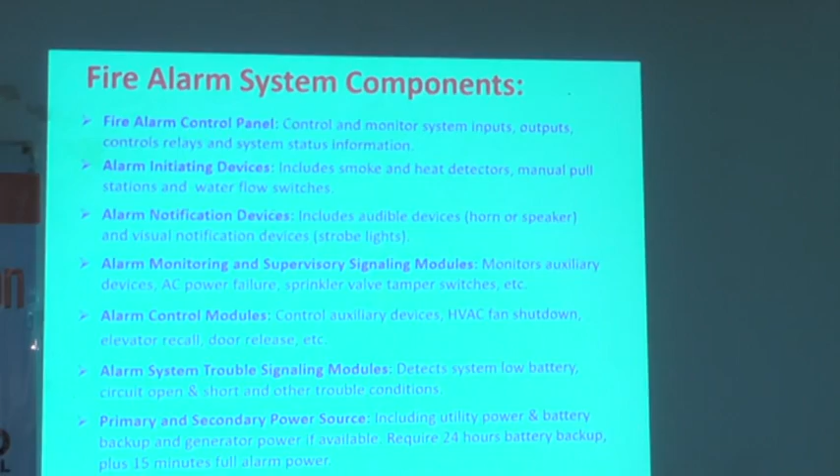We also have a monitoring device, a supervisory signal. The fire alarm signal is so important that if the wire is cut anywhere within the line, it gets a signal. There are 2 types of wiring, I'll come to that later. So it sends a supervisory signal and the signal comes back.

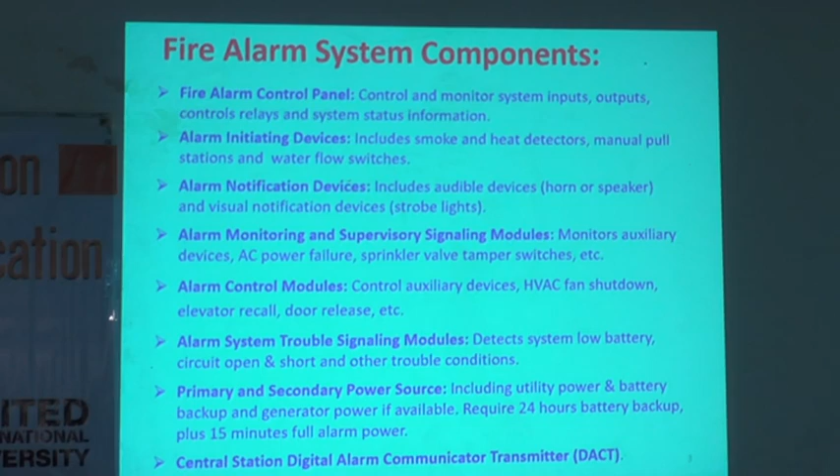At the end, either type A wiring has the wire come back, or type B wiring has an end-of-line resistor. So it sends a signal and that signal comes back to the panel, supervising the line. If the wire is cut anywhere, the panel knows and generates a supervisory signal, giving information on which floor or location the wire is cut.

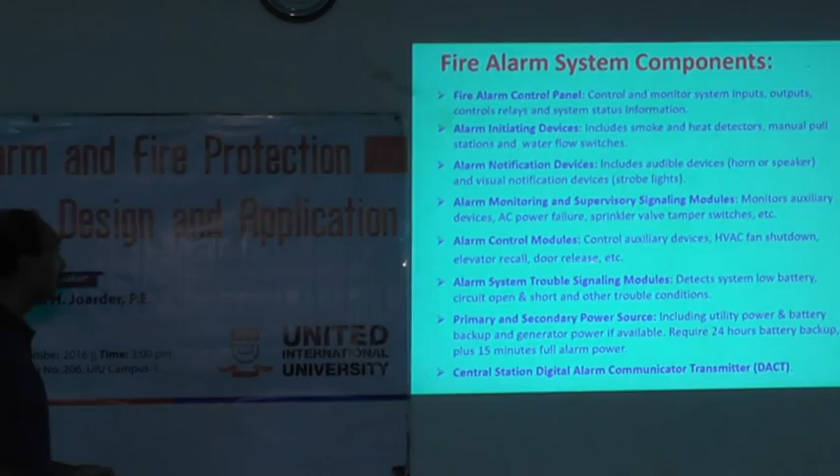There are other control modules, like modular air conditioning units that only supply air within one room. But in a larger building, they use a central air conditioning unit supplying air to maybe 2, 3, or 10 floors. So if there is a fire on one floor, that smoke goes into the central air conditioning unit and spreads all over the place.

That's why smoke detectors in the duct also monitor, and they shut down those fans automatically.

Also, if there is a fire on the 2nd or 3rd floor, we don't want the elevator to go there and disperse the occupants on that floor, because people might be walking into a fire. If there's a fire on the 3rd floor and people on the 1st floor don't know, they could take the elevator and come out on the 3rd floor where there is a fire. That's why the elevator automatically goes down to the 1st floor.

Primary and secondary power source: it's mandatory to have 2 sources of power, one is utility power, one is battery. It always has a 24-hour battery plus 15-minute alarm mode. So the battery can run the unit for 24 hours without alarm, plus 15 minutes in full alarm mode.

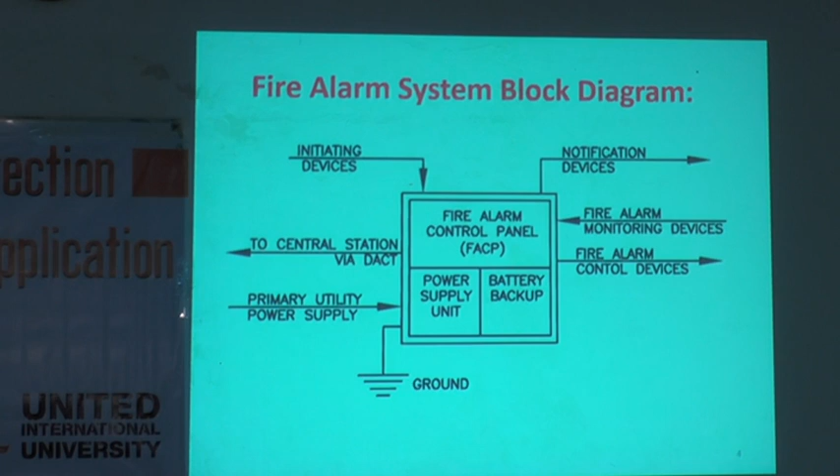This is the primary power, so it always has a grounding. So when these systems are installed, the grounding is always tested, to make sure that this system is grounded, so you don't have any interference or other ungrounded functions.

Voice alarm communication - those are normal fire alarm, but if it's a high-rise building in USA, it is considered 75 feet or taller. In USA, the tallest the fire department can go is 75 feet - their ladder cannot reach more than 75 feet.

So if there is a fire above 75 feet, the fire department has no way to reach there. That's why they have a special requirement for the high-rise building.

On a high-rise building, if you have a 20-story building and there is a fire, and a fire alarm going on, what will happen? Everybody will be rushing out. There will be a stampede, and instead of doing something better, trying to go through the stampede, there will be an accident and somebody falls down.

So in the high-rise building, what they do is, if there is a fire on say the 15th floor, the floor and the floor above and below - these three floors - they evacuate. So you have a scheduled, sequential evacuation. Not everybody is trying to get out at the same time, because that will cause a stampede.

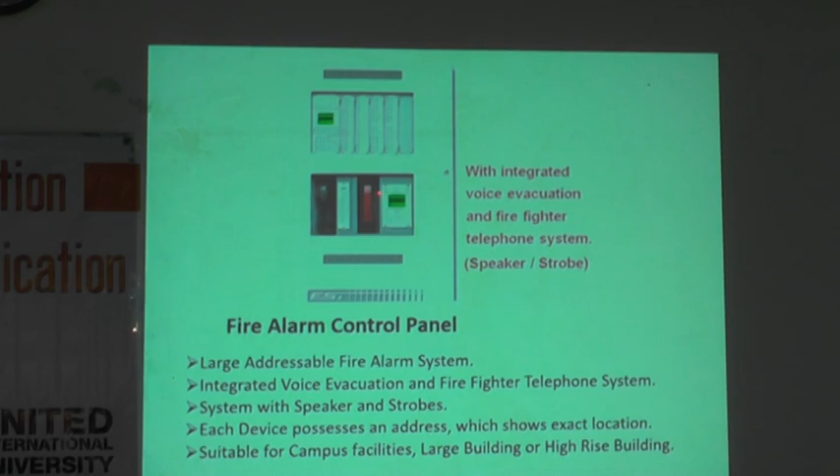And these are for the large volume system, for the high-rise. They have a telephone which will communicate with the fire department, and for high-rise buildings they call these large addressable systems - meaning if there is any condition anywhere, all the smoke detectors have an address.

They send a signal to pinpoint exactly which floor and which room number. When they install it, they program it - this device is programmed with where it's located, and there's a little LCD display that tells where it is.

On the LCD display, they will tell exactly which floor and which room number that the fire is in, so they could find out. And on each floor there is a fireman's phone - from the ground floor, on each floor there is a phone with a direct connection, so they could talk to each other, and they could also talk to the fire department.

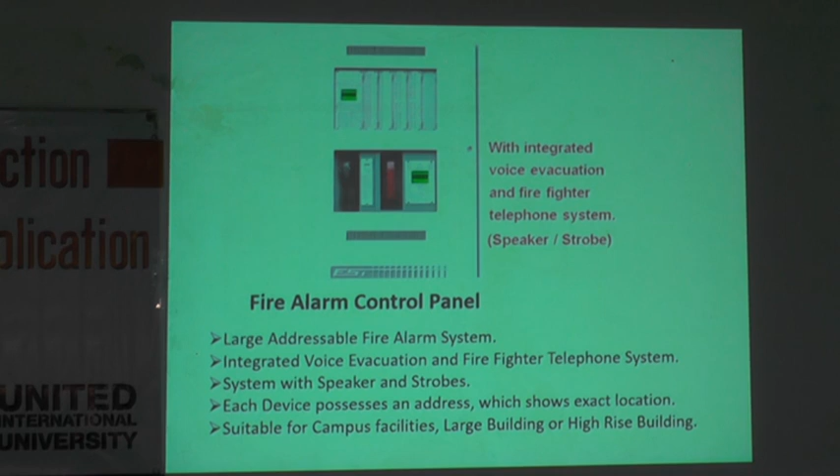And this is the announcement - this is the microphone, they could make announcements. This could be, if you have a campus with 3 buildings next to each other, they could be daisy chained and connected as a network, and connect to a computer system. Connection to this - so look at these ones.

They might have a computer station right next to it, with software. So this type of building has a main command center, and on each floor they have sub-panels, normally called DGP, data gathering panel. They are all looped together and connected to the computer.

As soon as there is a fire condition, it shows exactly which floor and location it is, with a graphic display. The floor plan will pop up. When they install it, they take the floor plan from AutoCAD drawings and program it, so each device is connected. If one device goes off, the floor map comes up and shows a star over that location.

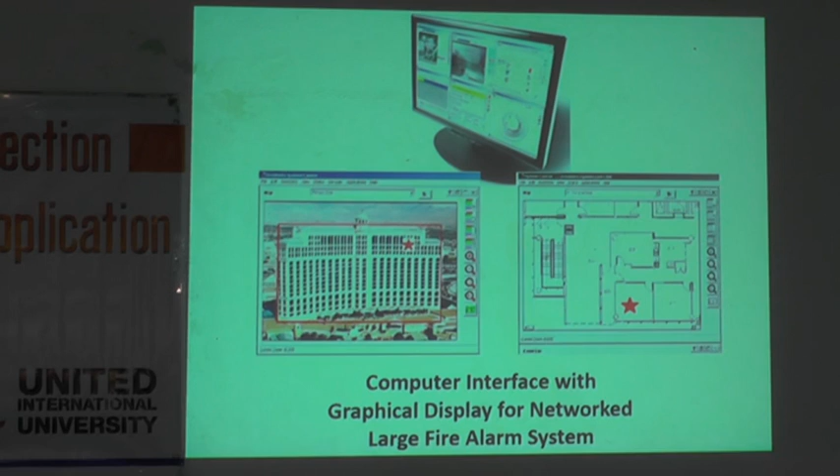So within 10 to 30 seconds maximum, the operator downstairs at the command center would know exactly where the fire is.

For occupants in these high-rise buildings, if you have a fire, there's no need to evacuate everybody. A building like this could have 2,000 people, and if you try to evacuate all 2,000 at once, you'd have a stampede - people falling on each other, stairs jammed.

So what we do: if there's a fire on, say, the 14th floor, we evacuate the floor above - 15th floor, 14th floor, and 13th floor. At the command center, they already know the fire is on the 13th or 14th floor. They go on the microphone and tell occupants of the 15th, 14th, and 13th floors to evacuate the building.

At that time they normally use the stairs, not the elevator, because the elevator might get caught or stuck with the fire. They use the stairs and go down, then watch what is happening - has the fire protection system started, or is the fire spreading? As that's happening, they request other occupants to evacuate as needed.

So these are the graphical displays in the network. If you have a campus situation, like many colleges or universities with 10 buildings, they could be daisy-chained with a command center at a central location, so you could monitor even 10 separate buildings from one location, all connected together through a fiber optic network.

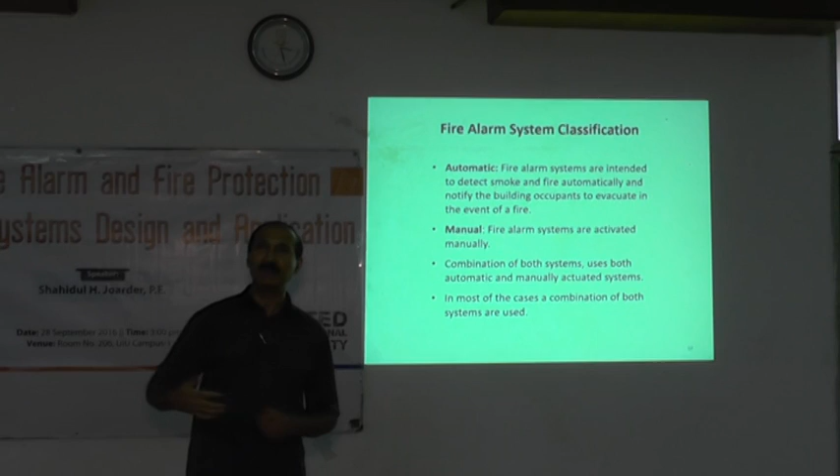Fire alarm systems have two clusters: automatic and manual, and they could be combination. Most places are actually combination. But some places like storehouses and retail malls could have just manual. They might not have anything automatic, just manual, because there are people all the time over there, so you don't need any automatic. If there is a fire, somebody will see it, and if they see it, they could manually activate. But most large buildings have both - a combination system.

Initiating device. Automatic initiating devices are smoke detector, heat detector, sprinkler, water flow switch. In the fire protection system, in the sprinkler, if water goes, there is a little water sensor. It senses that there is water going, so that also monitors it. And video image smoke detector - like newer cameras, some of the cameras can actually monitor if there is any smoke conditions. So those are automatic. Manual is a manual pull station, like in a police station, you could pull it. I'll show you in the next.

Smoke detectors, there are different types, okay? Ionization type, photoelectric, beam detector, air aspiration smoke detector.

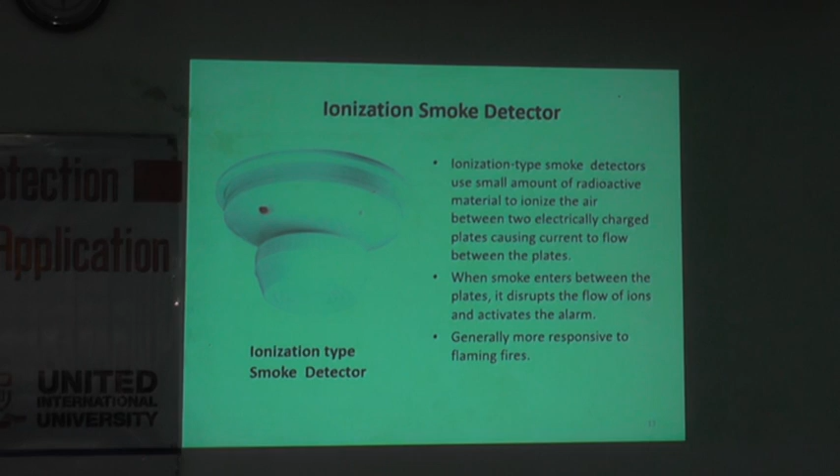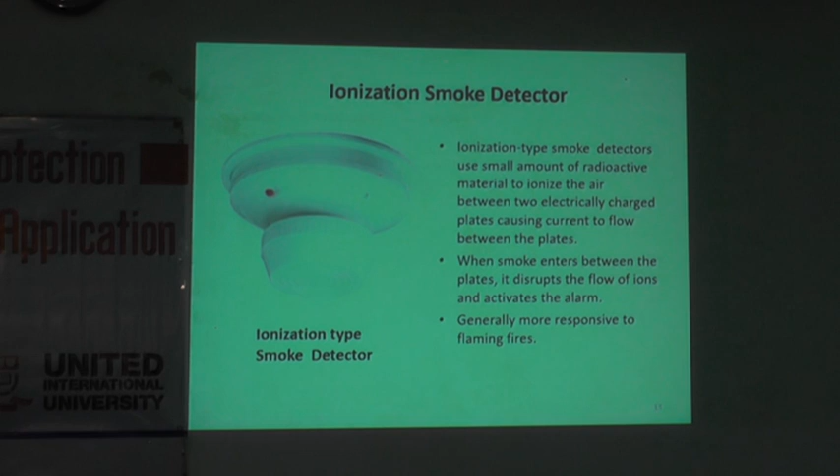Here is one - these are ionization smoke detectors. In the ionization smoke detector, there is a little bit of radioactive material within a chamber. As the smoke goes within this chamber, this radioactive material has a charge, like ions, and that causes current flow. As the smoke goes in there, that flow of current stops because the smoke is in between, and that's how it detects that there is a smoke condition. Now the ionization detectors are much less used over the period because there is a little radioactive material. As their lifespan passes, they last for like 10 years, after which they might need to be replaced. And at that time, we have to consider it as radioactively polluted, so you have to dispose them with special conditions to be taken. That's why they are using much less ionization type.

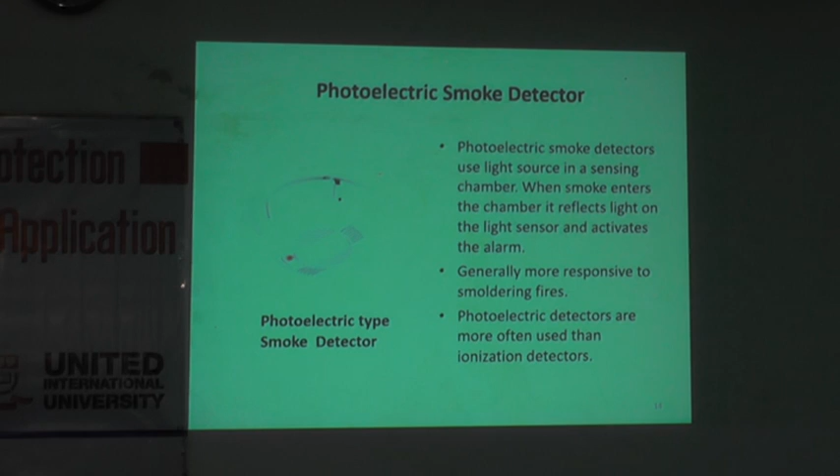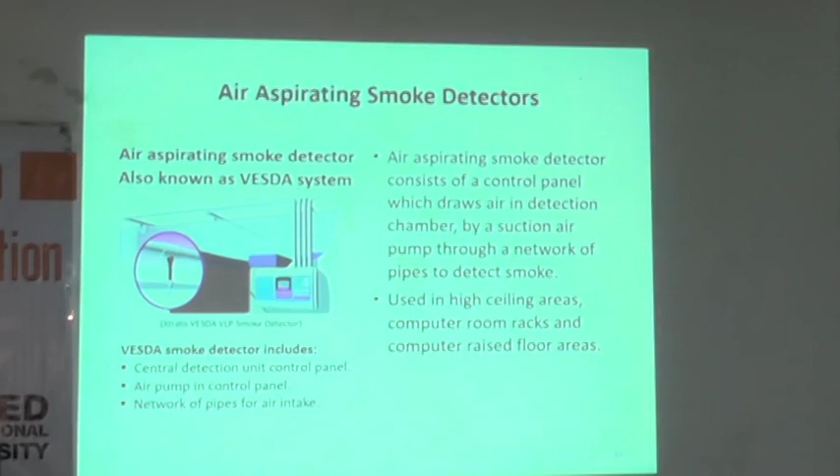These are called air aspirating smoke detectors. What it does is has a little control panel with a little vacuum pump actually - it sucks air through these tubes. The tube goes like this, you see one tube and then little short tubes branching off. These are normally used in computer rooms, data centers. The data center always has what's called a raised floor - normally installed about 18 inches high from the floor. So there is a false floor, like a false ceiling, they use a false floor.

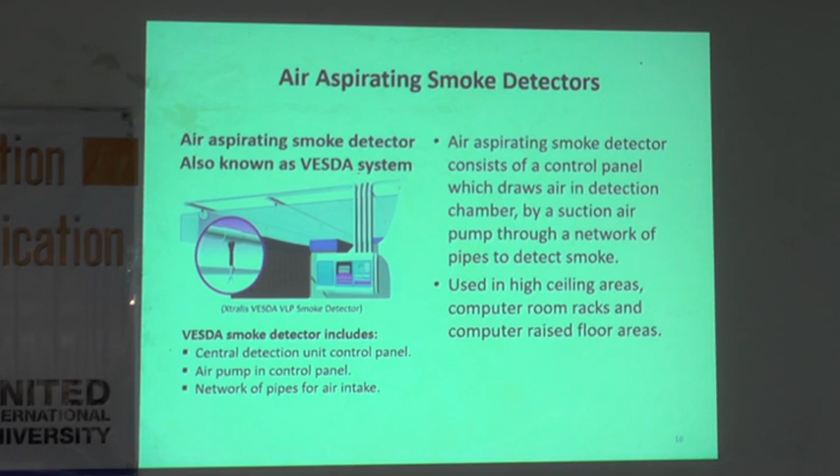The data center - I don't know if you've ever seen one - has hundreds, thousands of wires. If you open it up, it's like spaghetti of wire. I don't have the photos, but I could show you sometime if I remember. It's like spaghetti of wire, full of wires. And there is a very good chance of those wires at some time catching fire because of electrical malfunction, short circuit, or other reasons. So data centers are prone to electrical fire. Keep that in mind - I'm sure you remember there was a TV station that caught fire. Which one was that?

A TV station, right? If you ever went to a TV station, you saw spaghettis of wires. So if you have spaghettis of electrical wires, for whatever reason, at some point they could get a short circuit and they could catch fire. Okay? So normally, even in hung ceiling areas, when they have a large bulk of wire concentration, they normally use these. These are very effective because you could run a pipe through all this.

If you have a raised floor, you could run a pipe all the way to the raised floor. And this pipe has little holes every 18 inches. Okay, and it's sucking air. So it's continuously sucking air through its system, raised floor or over the ceiling, or in a confined space where you have lots of electrical wires. And it's analyzing in this control box if there is a fire. So these are the areas they use, okay?

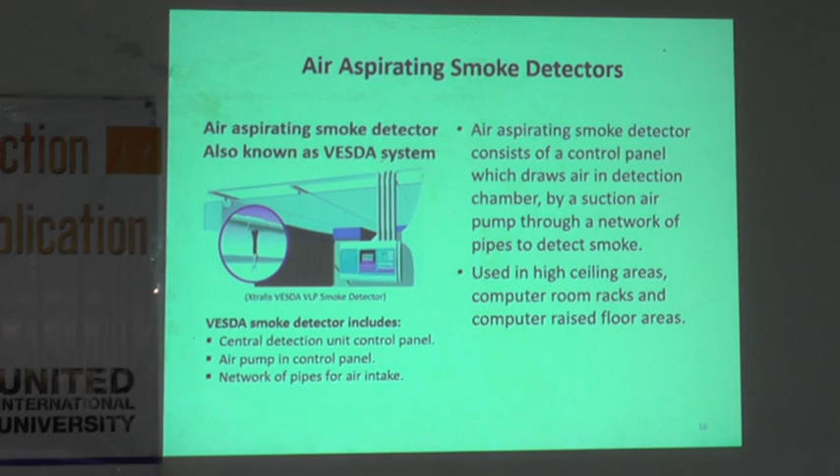So they use them in high ceiling areas, computer room racks, computer raised floor areas, and they could even be used in TV network stations, wherever there is a large amount of electrical wire and a chance of fire.

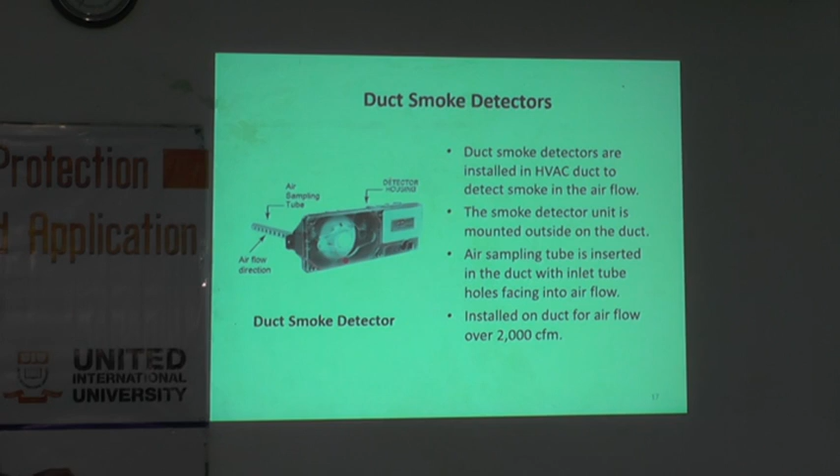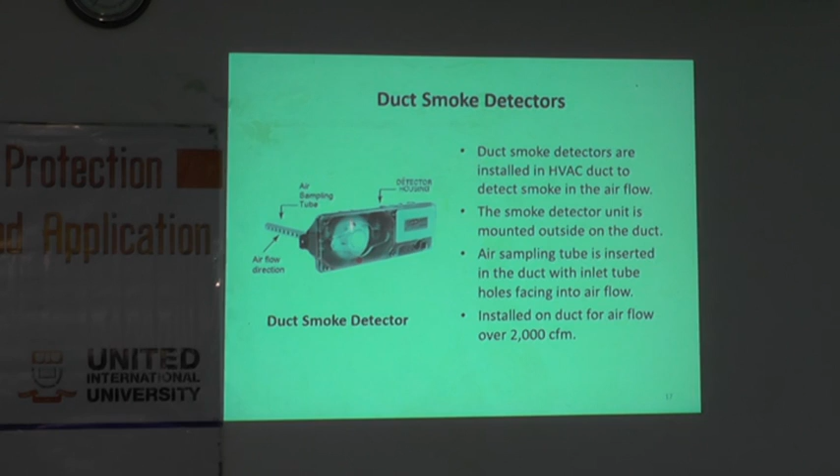Okay, these are the duct smoke detectors. This is what I mentioned in the beginning. If you have a duct supplying air to multiple floors, then you have this little tube. This tube goes inside the duct. So consider this as a duct, okay? This will have a tube going inside and a little box. This box will be outside, right over here.

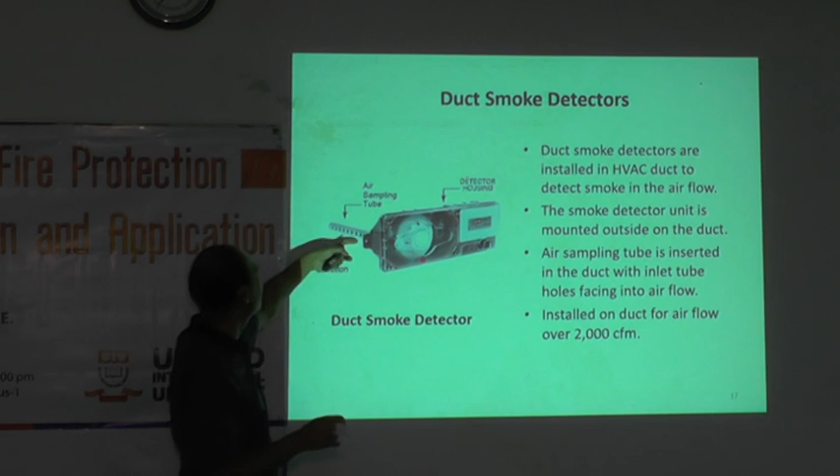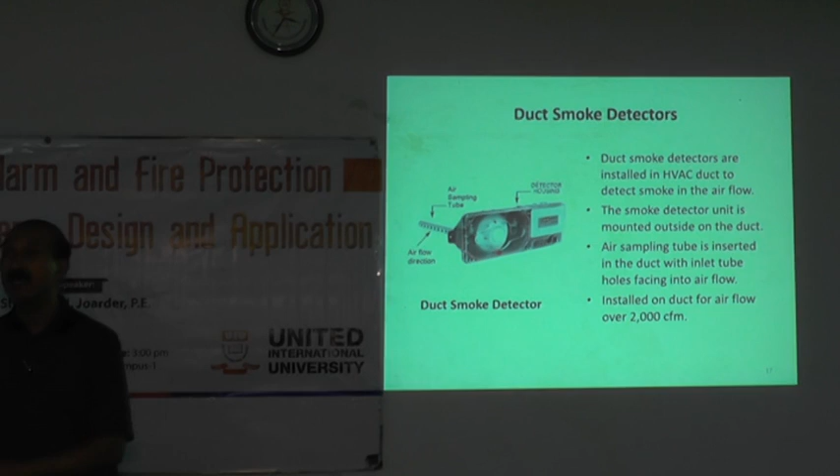And as the air passes through, it goes through these tubes. Because it has velocity, it automatically comes into this chamber, and it always gets analyzed. And if there is any smoke detected, they'll shut down that air handling unit immediately, so the smoke does not spread to any other place.

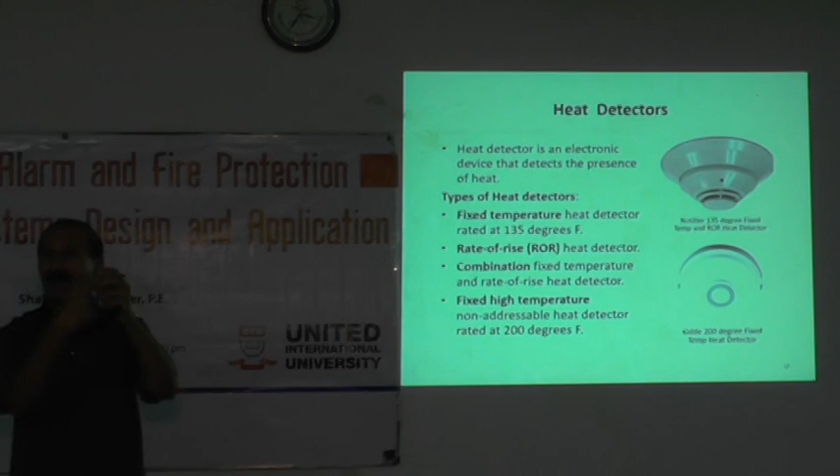These are the heat detectors. Heat detectors normally have two different types, either fixed or rate of rise, and there could be a combination also. There are also high temperature ones used in boiler rooms and others. The way they work is they have bimetallic strips. So if there is heat, the bimetallic strip, two metals, bends and makes contact. Normally it's the bimetallic strip or an electronic circuit with a material that senses heat.

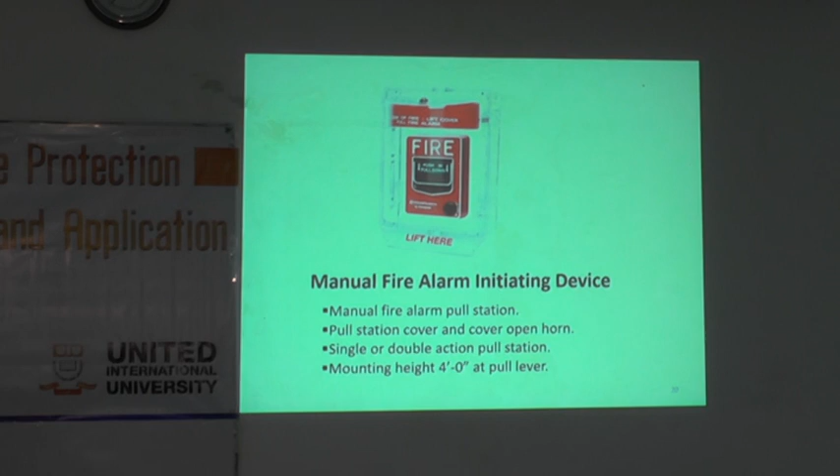These are the manual pull stations. These are normally installed at the building exits. If you see a fire and you are running out of the building, you could pull it so other people know there is a fire. These are always installed within 5 feet of the exit door. If you have multiple stories, you put one within 5 feet of the exit door of each floor, and also at the exit of the building. And these are manually operated.

Now there is always a concern, like in school, especially in university, just before the exam you will have a fire condition, okay? You know why? Because we have done that also.

So they use a cover. This cover has a battery inside it. As soon as you open this cover, it sounds a local alarm. Woo! Okay? So you still haven't pulled it yet, you only opened the box. As soon as you open the box, it starts making sound.

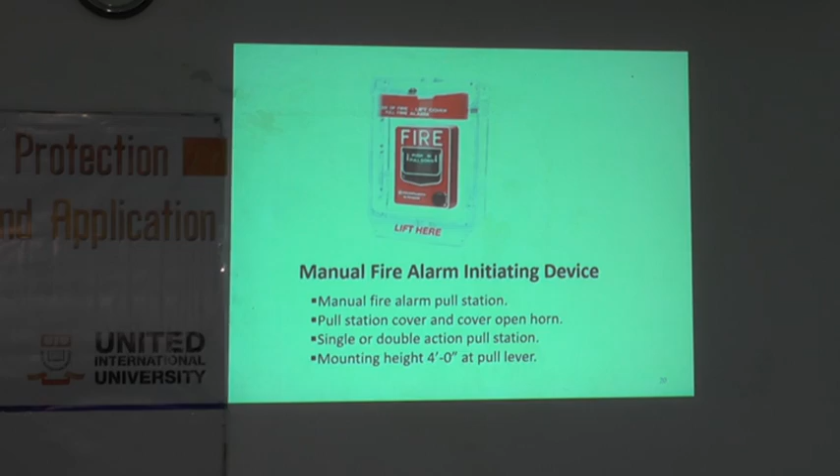So in a condition like this, if somebody is trying to play with it, as soon as you open the box, it starts sounding. So other people will see he's doing something, messing with that, before you even pull. But if it is a real fire, of course then you pull. So these are called double action, okay?

You can't just pull it. You have to lift it and pull it. That's a double action. You have to take two little steps. It's still two actions, okay? So open the cover and pull it. Double action. You see here, pull.

So you'll see in the catalog cards, pull stations come as single action and double action. Double action means you have to pull a cover and then pull it. So you have to take two steps. And while you're pulling the cover, you could put a little alarm on that. So as soon as you open the cover, it's making a sound, so other people around could see.

The valve tamper switch. If you have a sprinkler system and you have a water valve, if you close the valve, your fire protection system is no good anymore. It's dead because you closed the valve. So we monitor the valves. At each valve, there is a tamper switch. As soon as you're closing the valve, that switch also closes and sends a signal to the fire alarm system that the valve is tampered. That's why they call it a valve tamper switch.

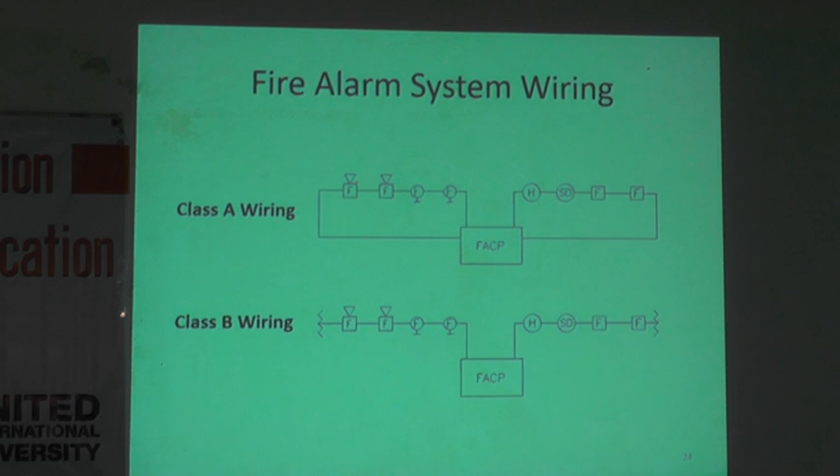Class B wiring, this is called end of line resistor. So the fire alarm control panel sends a signal, the end of line resistor then sends a signal back. Okay, so that's how they monitor. In this case, if the wire gets cut off over here, these two will not be functioning anymore, but these two will be.

But the fire alarm control panel will get a signal: okay, I'm sending a signal, that signal is not coming back. That means I have a wire cut off someplace. And it will initiate a supervisory signal for troubleshooting. Okay?

Codes. Well, the newer Bangladesh National Building Code implemented a lot of fire alarm and fire protection requirements. It happened that I did not get hold of the latest code. Does anyone know what the latest code is? I have a draft version of 2015. Anyone have any idea?

The main requirement is the building code. If the code does not enforce it, nobody is voluntarily spending money. You have to force it, or it's not going to happen.

So the code is the enforcement. The newer code, the draft version I saw, has a very detailed requirement for all the fire alarm and fire protection system. I'm sure after all the high-profile fires happened, and a lot of people, parents died, very unfortunate. This newer code is implementing all those requirements.

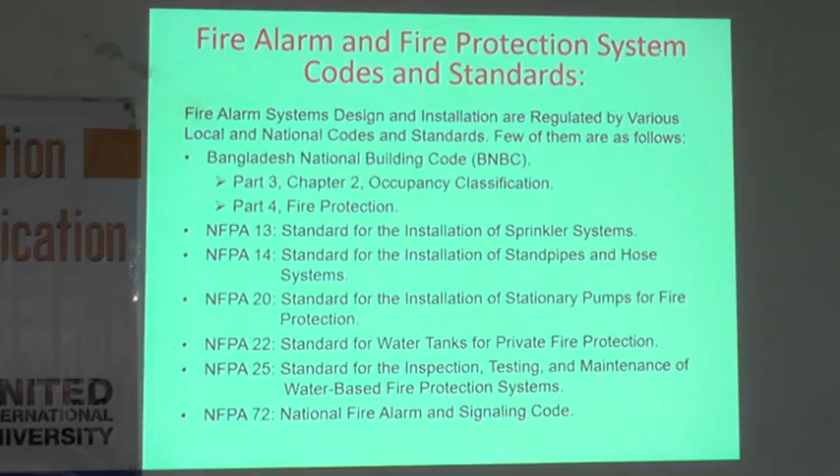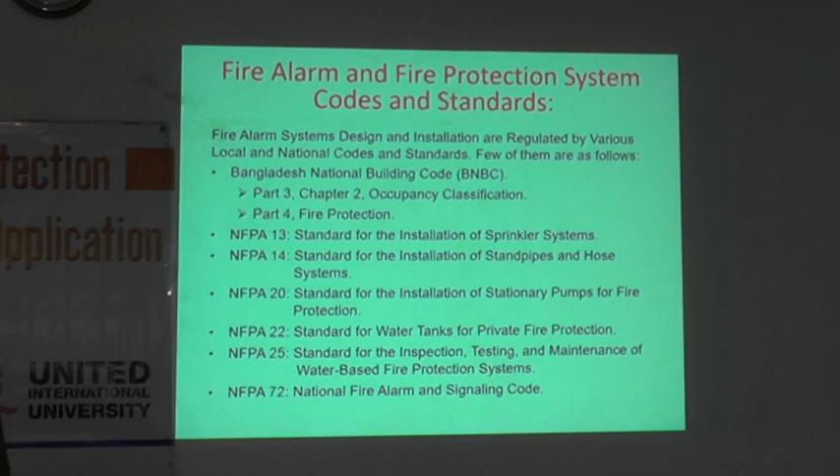If it is a residential building, you might have only 10, 20, or 30 people, but not more than 2, 3, or 4 people per apartment. So if you have a fire in an apartment, only 4 people will be influenced, and it could spread. But in a garments industry, you could have 1,000 or 2,000 or 10,000 people. You never know the size, and that could influence a large number of people.

So that's why the occupancy classification is very important. The building code classifies this occupancy classification, and the system requirement is also based on the occupancy classification.

So this is the sprinkler standard, not code - keep that in mind. The National Fire Protection Association does not write codes, they write standards. There is a difference. They are not mandatory; the building code is mandatory. So based on the building code's occupancy classification, you have to follow what these standards say. They tell you how to do it, and they tell you why to do it.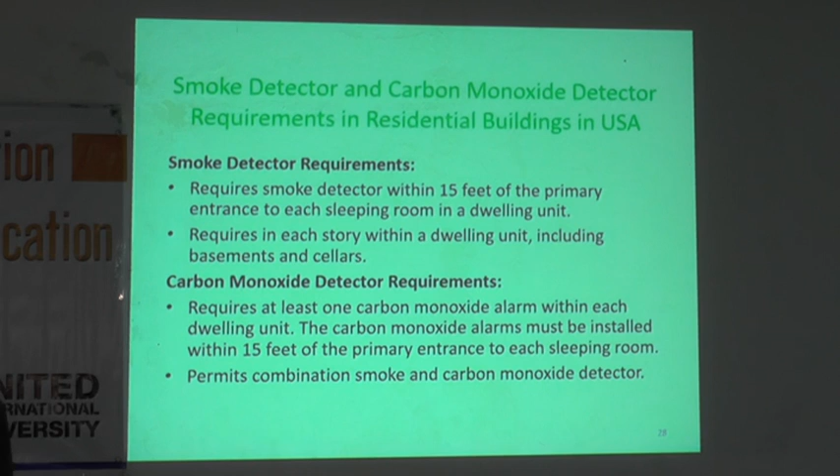ফায়ার অ্যালার্ম সিস্টেম ডিজাইন করার সময় একটা ফ্লোর প্ল্যান লাগে, আর্কিটেকচারাল ড্রয়িং এ রুম নাম্বার দিয়ে সব ডিভাইসের লোকেশন দেখাতে হবে, কোন রুমে কি থাকবে। এছাড়া অ্যালার্ম কন্ট্রোল অ্যান্ড ট্রাবল সিগন্যাল, অ্যানাউন্সিয়েশন, পাওয়ার কানেকশন এবং রাইজার ডায়াগ্রাম দেখাতে হবে। ইঞ্জিনিয়ার ডিজাইন করার সময় এই সব ফলো করে দেখাতে হবে।

পরবর্তী স্লাইডে কিছু ডিজাইন দেখাচ্ছি। বিল্ডিংয়ের কোন কোন রুমে স্মোক ডিটেক্টর হবে এবং দরজার কাছে পুল স্টেশন হবে, এগুলো দেখাতে হয়। এগুলো লোকাল বিল্ডিং ডিপার্টমেন্ট আর ফায়ার ডিপার্টমেন্ট অ্যাপ্রুভ করার পরে কনস্ট্রাকশন হয়। কনস্ট্রাকশন হওয়ার পরে কন্ট্রাক্টর টেস্ট করে, ইঞ্জিনিয়ার উইটনেস করে সার্টিফিকেট দেয়, তারপর ফায়ার ডিপার্টমেন্ট এসে আবার টেস্ট করে অ্যাপ্রুভাল দেয়।

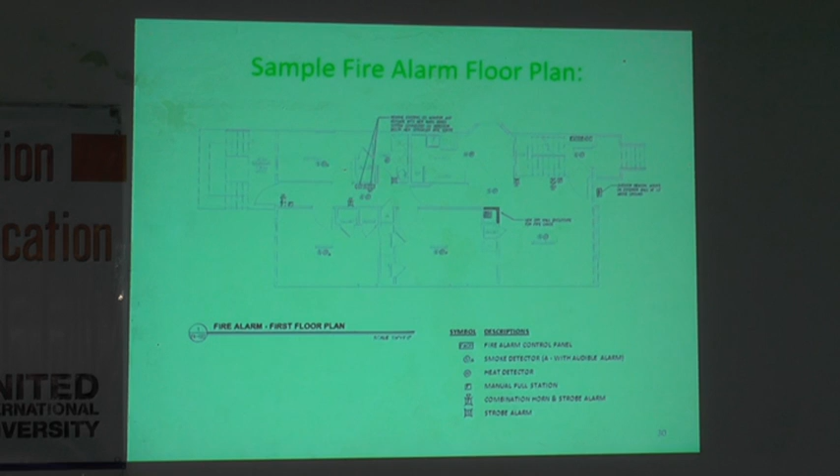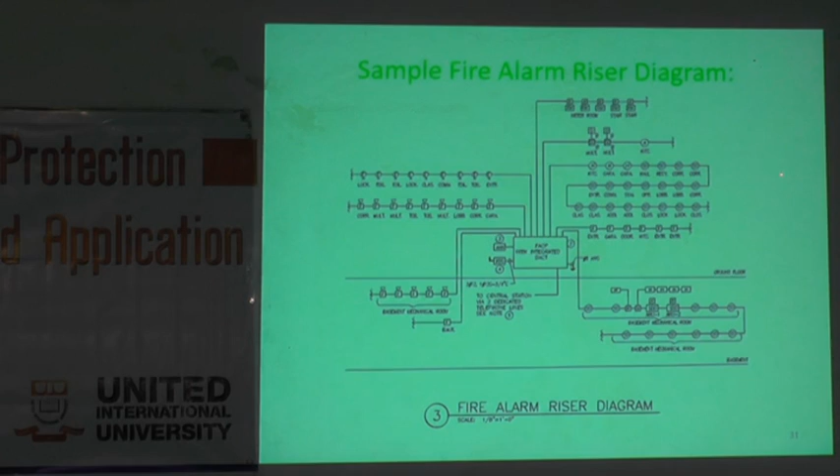এই হলো ফায়ার অ্যালার্ম কন্ট্রোল প্যানেল। এখান থেকে নোটিফিকেশন ডিভাইস একটা লুপে যায় আর অ্যানাউন্সিয়েশন ডিভাইস আরেকটা লুপে যায়, এইভাবে কানেকশন হয়। মাল্টিপল ফ্লোর হলে আরেকটা প্যানেল হবে, দেয়ার ইজ রাইজার ফ্লোর টু ফ্লোর।

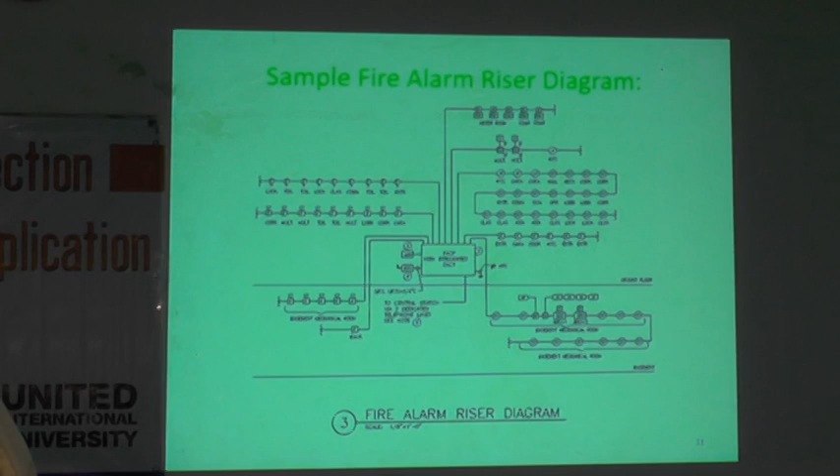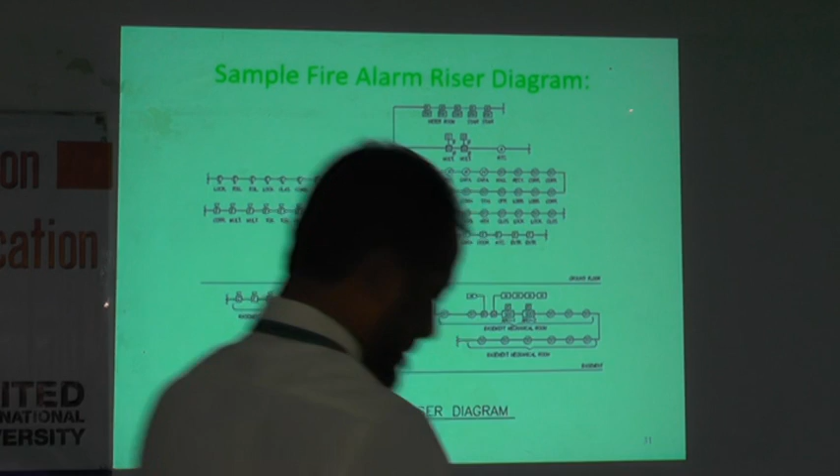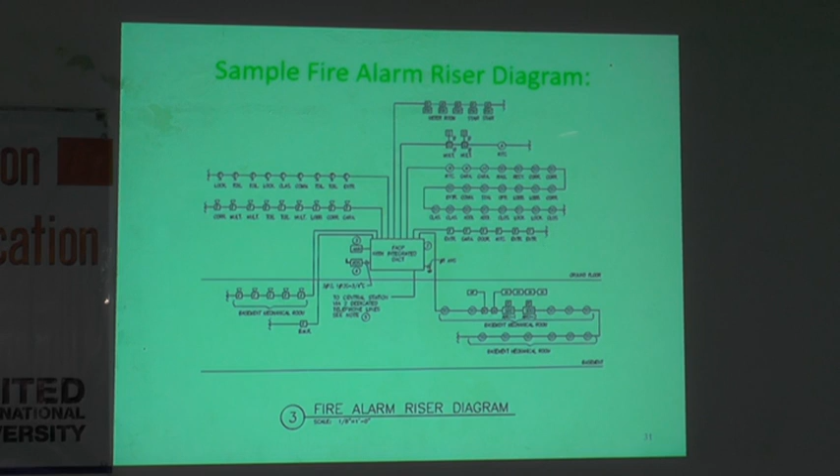এই হলো ফায়ার অ্যালার্ম সিস্টেম ডায়াগ্রাম। ফায়ার অ্যালার্ম সিস্টেমে মান্ডেটরি তিনটা ডায়াগ্রাম লাগবে: ফ্লোর প্ল্যান, রাইজার ডায়াগ্রাম যেখানে ওয়্যারিং কানেকশন দেখানো হয়, আর অপারেশনাল ম্যাট্রিক্স। এটা আসলে একটা বড় রিয়েল ম্যাট্রিক্স ছিল, ছোট করে ঢুকানো হয়েছে। এতে দেখানো হয় কোনো ফায়ার পুল স্টেশন অ্যাক্টিভেট হলে প্রতিটা ডিভাইসের অ্যাকশন-রিঅ্যাকশন কি হবে। এটা ম্যান্ডেটরি এবং এটা NFPA 72 তে আছে। এই শিট ছাড়া ফায়ার অ্যালার্ম ড্রয়িং পাস হবে না।

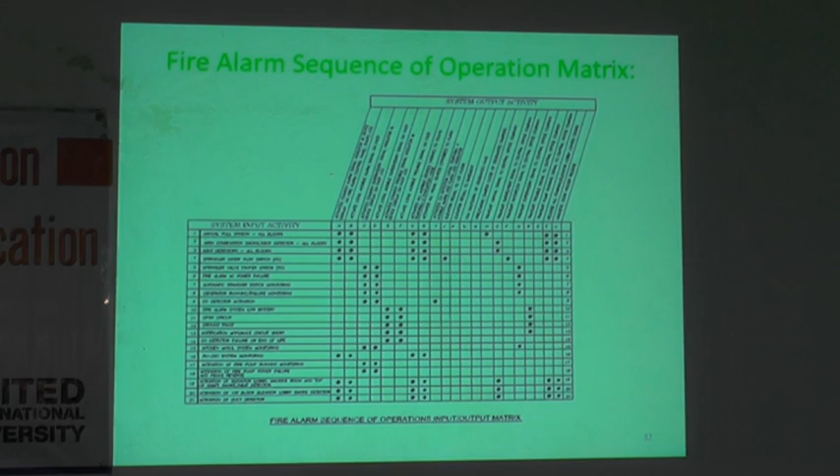Okay, this is all for fire alarm system. Any question? No question? Everybody understand? Okay.

Fire protection system automatically or manually activated and suppresses the fire. There are different types of fire suppression systems depending on the building classification and occupancy classification, and they are connected to the fire alarm system.

These are the different types: automatic wet pipe sprinkler system, which is the most common; wet pipe standpipe system; combination sprinkler standpipe system; and manual dry pipe sprinkler system. So wet pipe and dry pipe - these are the different types, as I will explain them.

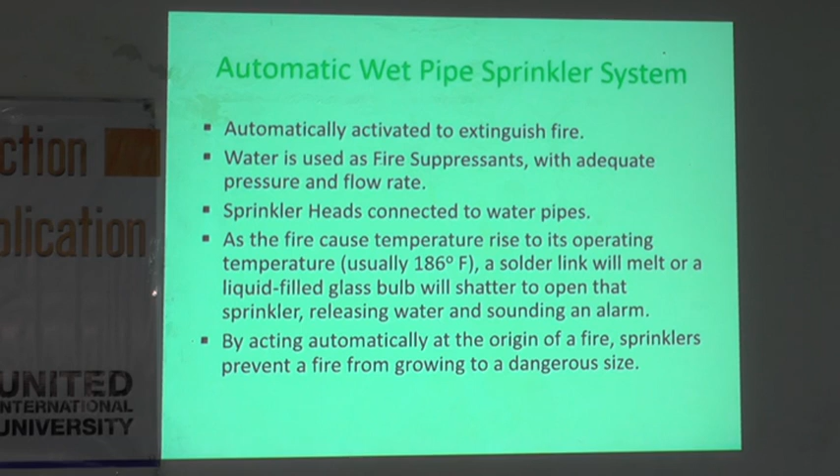ওয়েট পাইপ স্প্রিংকলার সিস্টেমে স্প্রিংকলার হেড থাকে, পাইপ থাকে এবং হেড থাকে। ফায়ার হলে স্প্রিংকলার হেডটা অ্যাক্টিভেট হয়ে যায়। এর মধ্যে একটা লিংক থাকে, একটা পার্টিকুলার ম্যাটেরিয়াল থাকে যার ভেরি স্পেসিফিক মেল্টিং পয়েন্ট আছে, যেটা হলে ওখান থেকে পানি রিলিজ হয়।

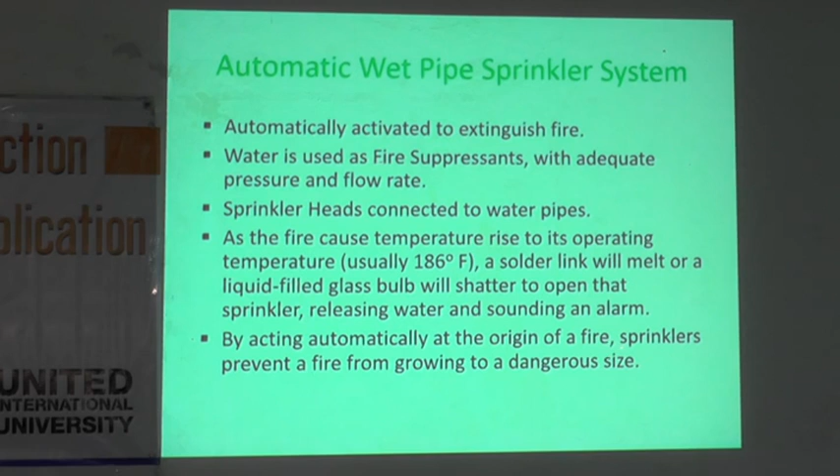এই হলো স্প্রিংকলার হেড, এখানে একটা গ্লাস বাল্ব থাকে, এর ভিতরে সাধারণত একটা মার্কার, একটু অ্যালকোহল মতো জিনিস থাকে। যখন আগুন ধরে তখন সেটা শেষ হয়ে যায় এবং গ্লাসটা শাটার হয়ে যায়, গ্লাস শাটার হলে এখান দিয়ে পানি আসা শুরু হয়।

বিল্ডিং এর রাস্তা থেকে পানি আসলো, পাইপে গেল, তারপর স্প্রিংকলার। একটা স্প্রিংকলার ১৫ ফিট বাই ১৫ ফিট কভার করতে পারে এবং স্প্রে নজলের মতো স্প্রে হয়। সো এভরি ১৫ ফিটে একটা স্প্রিংকলার লাগবে এন্টায়ার বিল্ডিংয়ের জন্য।

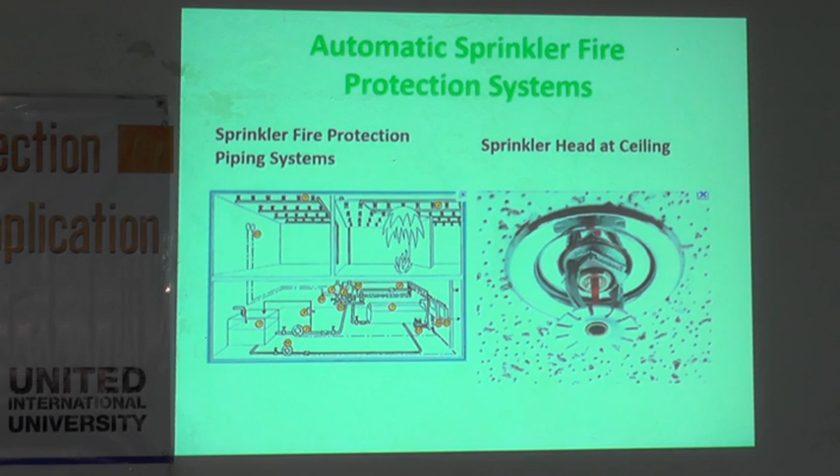Sprinkler system costs about $1.50 to $10 per square foot. এখানে ডিফারেন্ট টাইপ অফ পাইপিং আছে, সেটা দেখতে হবে কিরকম খরচ পড়ে।

এই দেখেন স্প্রিংকলার হেড এইভাবে সিলিং এ থাকে। পানির পাইপটা যায় ঠিক যেখানে আগুন ধরলো ওইখানে পানি স্প্রে শুরু হয়ে যায়। আগুন ধরলে, before it is sprayed too much, it will start suppressing right at the center automatically. You don't have to come with the hose pipe.

These are the different types of sprinkler head. এটাকে বলে পেন্ডেন্ট, মানে এটা ডাউন সাইড হয়। বিভিন্ন কনসিডারেশন এবং কনস্ট্রাকশন পদ্ধতি অনুযায়ী বিভিন্ন টাইপ ইউজ হয়, এখানে স্প্রিংকলার হেড এইভাবে ইউজ করা হয়।

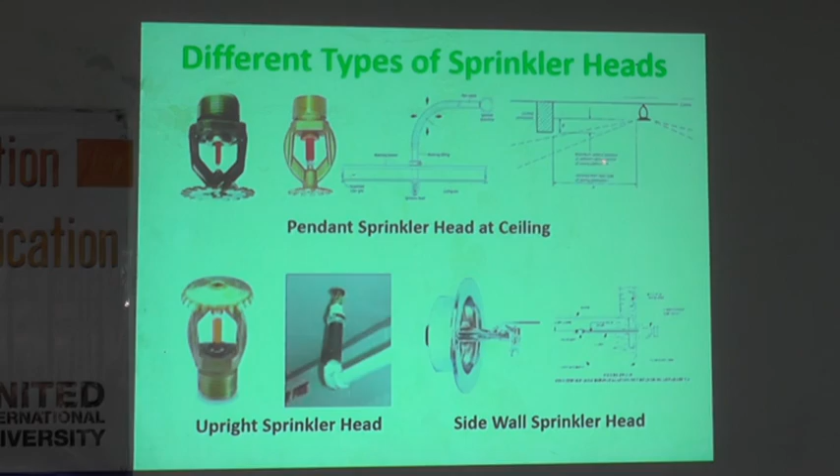These are the upright heads. If you have wood construction with a wood ceiling, you need upright heads, because that's common with wood ceiling buildings and fires. If the sprinkler head faces this way and there's a fire on top, it won't suppress properly. So the head points upward, goes up, and then comes down. That's the upright head.

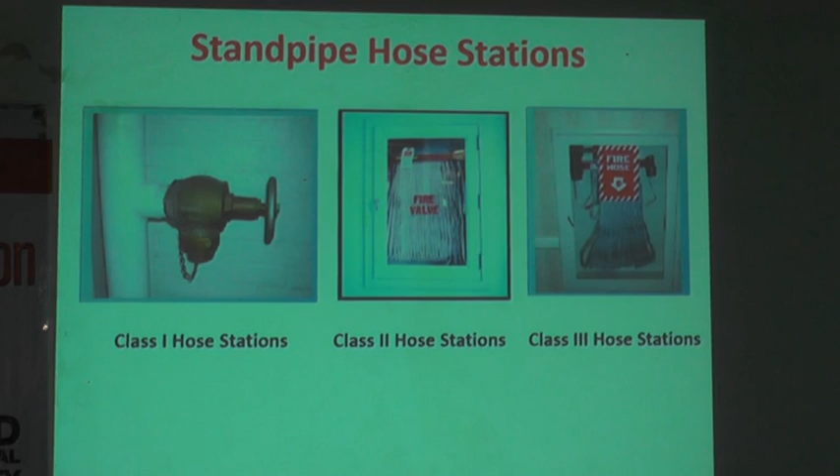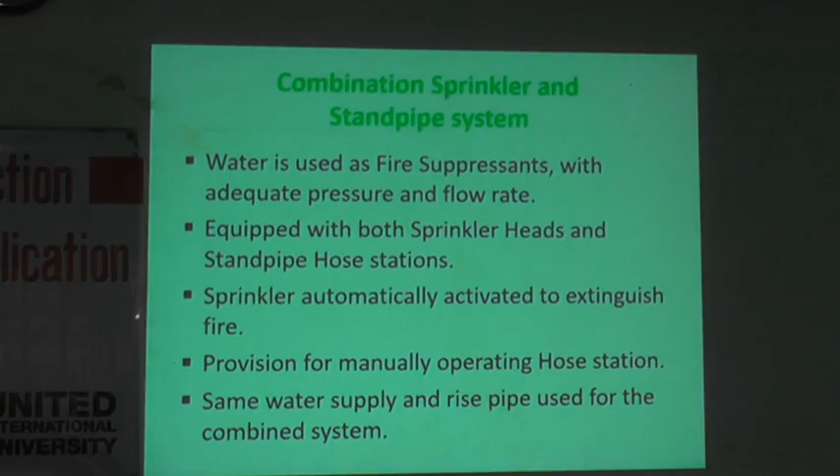Combination sprinkler hoses - normally high-rise buildings always have a combination system, and it's also required by building code. High occupancy, high-rise buildings need a combination sprinkler system. So the sprinkler exists plus a hose valve exists. If a fire happens, the sprinkler automatically starts extinguishing, and then as the fire brigade comes in, they could use that hose to finish it off.

The idea is the sprinkler can substantially reduce the fire; if not eliminate it entirely. In case of fire, the sprinkler activates automatically and starts suppressing it. It might not finish it, but it will substantially reduce it and prevent it from spreading. Then as the fire brigade arrives, they can use the hose to finish it out completely. If you have no system at all, the fire will spread all over the place.

Design process - how to design the fire alarm and fire protection system. The first thing is the building code. You have to check the building code: what is my occupancy classification, what is my requirement? Building codes specify this - for a building, if water comes from the front, normally from the street, you consider the farthest point in the building.

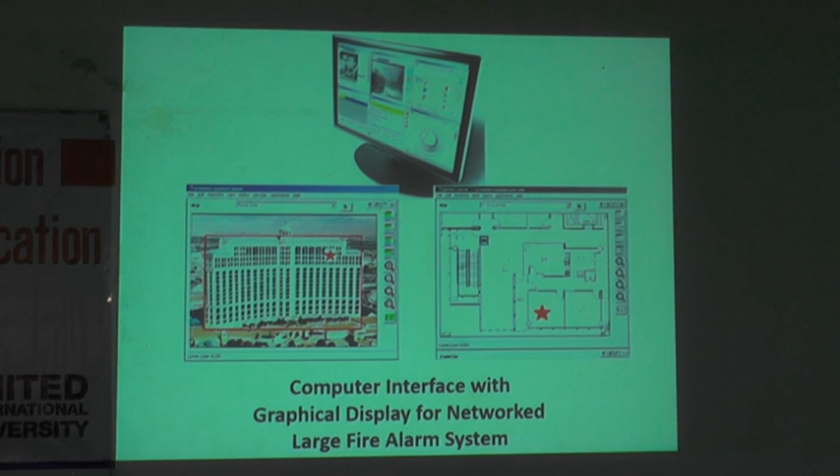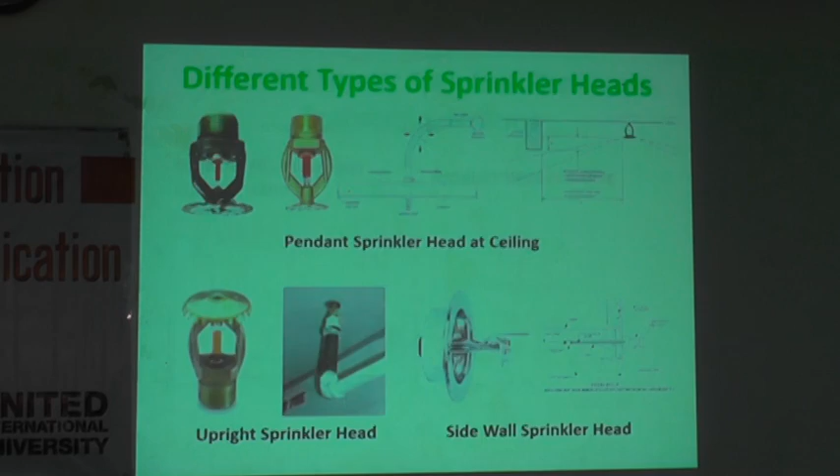So here is the 1500 square feet room. So the farthest point at 1500 square feet you calculate through hydraulic calculation.

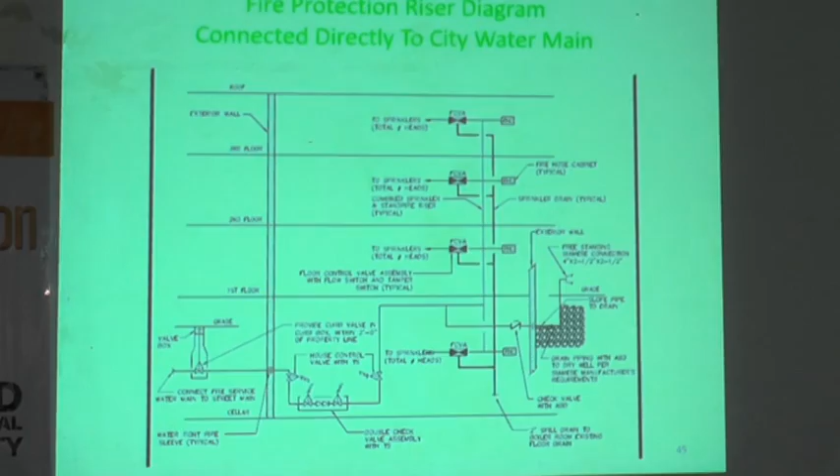In the USA, if you have to design a fire protection system for any building, you have to request the water department to do what's called a hydrant flow test. You pay a $500 fee and they come and do a test on the street to tell you exactly what your pressure is in front of your building.

The engineer takes that letter, they issue a letter, and they flow 500 GPM. There are two readings called static pressure and dynamic pressure or residual pressure. The static pressure is without flowing the water, and then they release the water at 500 gallons per minute and see what the residual pressure still is.

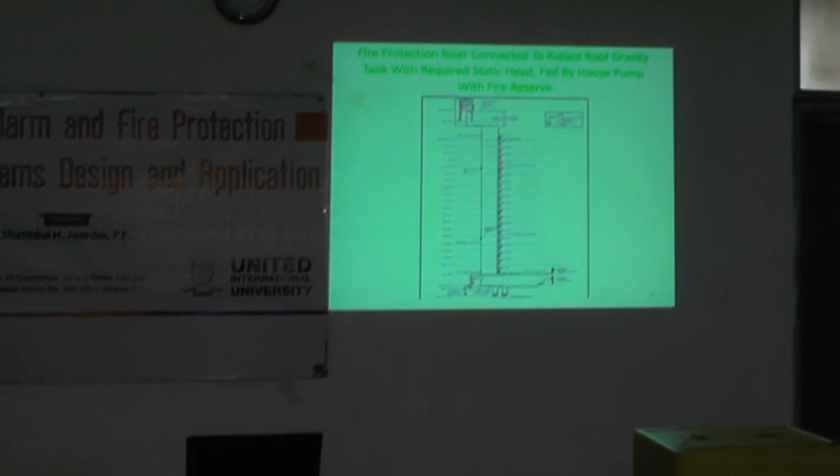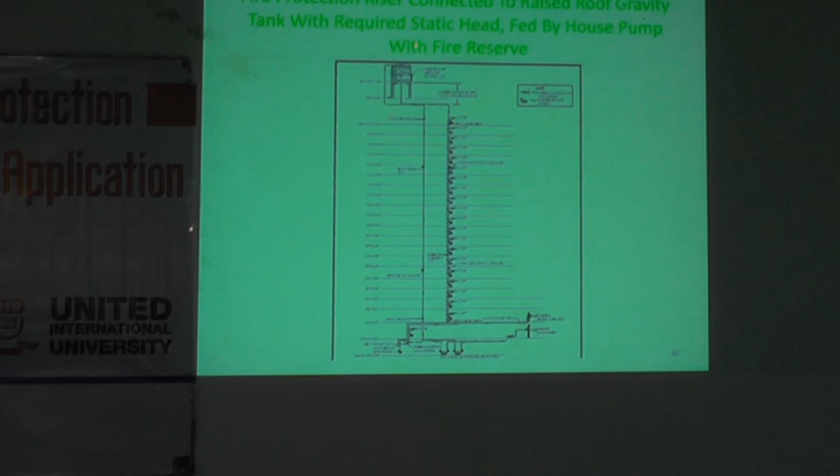সেই জন্য পানি রাস্তা থেকে আসতেছে, তারপরে হাউস পাম্প দিয়ে ছাদে উঠানো হচ্ছে এবং স্টোরেজ করা হচ্ছে। এই ট্যাঙ্কটা সাধারণত 2 ভাগ করা থাকে - উপরের টুকু ডোমেস্টিক ওয়াটার রিজার্ভ, নিচের টুকু ফায়ার ওয়াটার রিজার্ভ। ইঞ্জিনিয়ার ক্যালকুলেশন করবে ফায়ার ওয়াটার রিজার্ভ কতটুকু লাগবে এবং ডোমেস্টিক ওয়াটার সাইজ কত লাগবে, সেই অনুযায়ী ট্যাঙ্কটা সাইজ করবে।

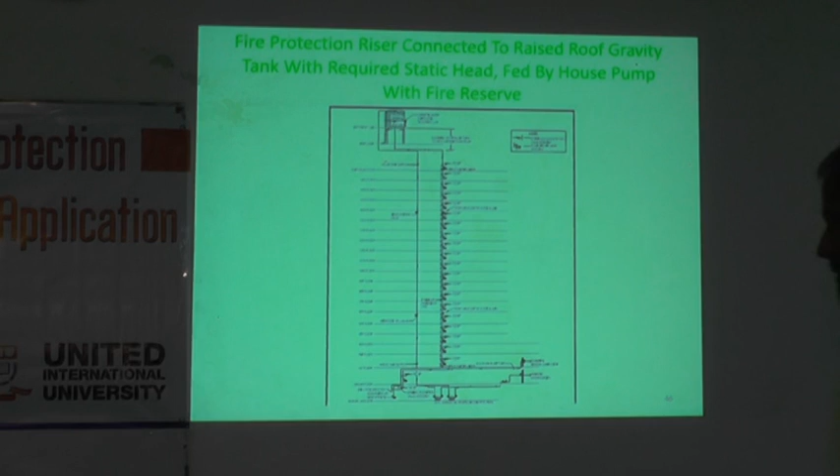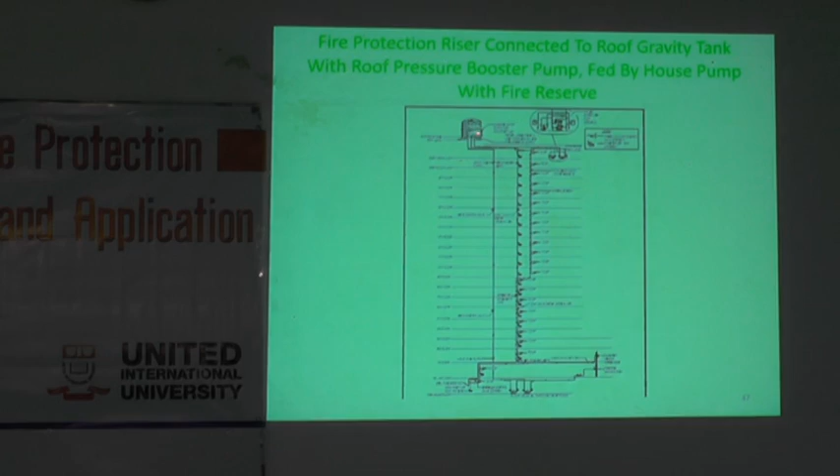ওই 32 ফিট উঁচা করতে হবে, সেটা অ্যাভয়েড করার জন্য ছাদে একটা পাম্প বসায়। এই পাম্পটা ফার্স্ট কয়েকটা ফ্লোরের জন্য, উপরের আপার ফ্লোরে ওই পাম্পের সাহায্যে পানি দেওয়া হচ্ছে। এই ট্যাঙ্কের থেকে গ্র্যাভিটি ফ্লোতে নিচের তালাগুলো দেওয়া হচ্ছে, কারণ ট্যাঙ্ক অনেক উপরে আছে। যদি 20 তলা বিল্ডিং হয় তাহলে 10 তলার নিচে এনাফ প্রেসার আছে, কিন্তু উপরের ফ্লোরগুলোতে এনাফ প্রেসার থাকবে না।

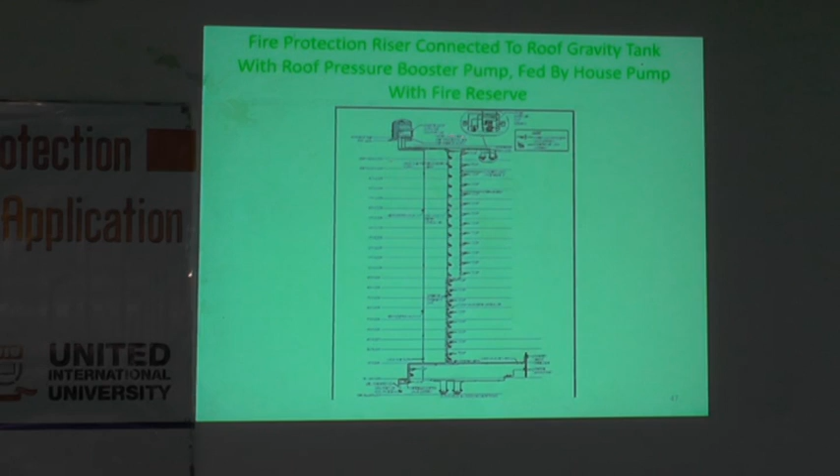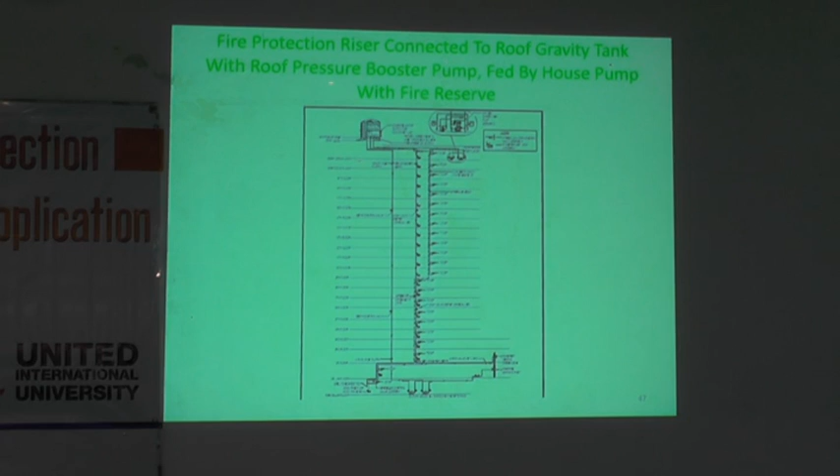সুতরাং ছাদে একটা পাম্প বসানো হয়। ইঞ্জিনিয়ারিং ক্যালকুলেশন করা হয় এক্স্যাক্টলি কয়টা ফ্লোর দিতে হবে। ওই হাইড্রোলিক ক্যালকুলেশনের মাধ্যমে সেই কয়েকটা ফ্লোর পাম্পের মাধ্যমে দেওয়া হয়, বাকিগুলো নিচেরগুলো ট্যাঙ্কের মাধ্যমে গ্র্যাভিটি ফ্লো দেওয়া হয়। এটাকে বলে প্রেসার বুস্টার পাম্প, ফর দ্য হায়ার ফ্লোর।

So gravity tank with roof pressure booster pump. We have a pump here, supply this. এটা আপনাকে ট্যাঙ্কটাকে উঁচু করতে হবে না, ঠিক ছাদের উপরে মনে করেন 3 ফিট উপরে বসাতে হবে। But you have to add 2 pumps. Always 2 pump use করা হয়, যদি একটা ফেল হয় you have a second one।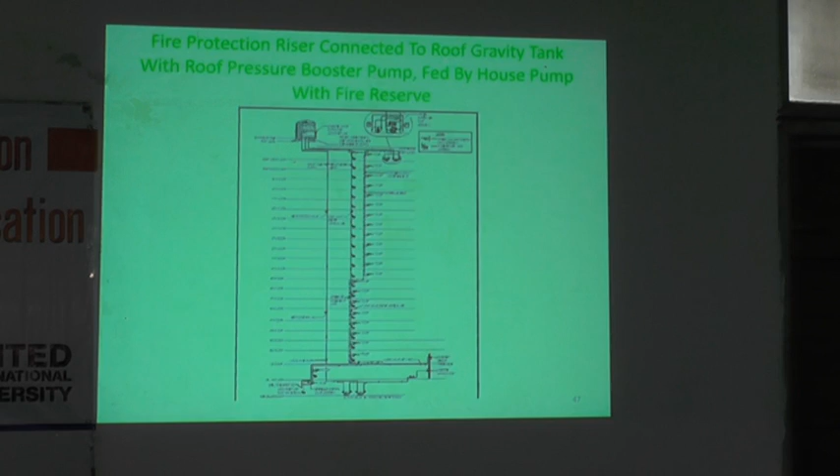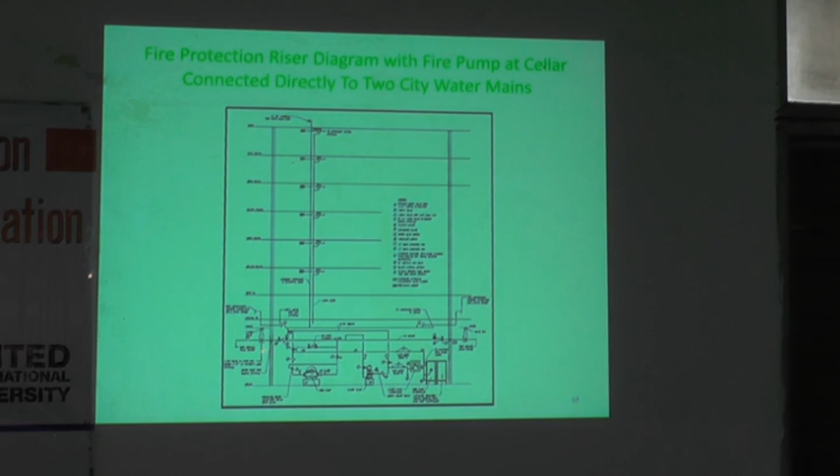এটা হলো যখন আপনার কোনো ট্যাঙ্ক নেই। যদি রাস্তার ওয়াটার ডিপার্টমেন্ট চিঠি দেয় হাইড্রেন্ট ফ্লো টেস্ট করে, বলে যে এনাফ প্রেসার আছে এবং ওয়াটার আছে, তাহলে ঠিক আছে। শুধু প্রেসার নেই কিন্তু সাপ্লাই আছে, তাহলে আপনি একটা ফায়ার পাম্প বসাবেন। ফায়ার পাম্প দিয়ে it will feed the riser. In case of fire, this fire pump turns on and supplies.

Normally in this case they always supply through 2 sources. একটা বিল্ডিং যদি বড় হয়, তাহলে একটা পানি রাস্তা আসবে এই সাইড থেকে আর একটা আসবে অন্য সাইড থেকে। So you have 2 sources of supply। যদি আপনার fire pump থাকে এবং tank না থাকে, তাদের 2 source of supply এর জন্য request করতে হয়। সাধারণত রাস্তার প্যারালাল কানেকশন থাকে, রাস্তার দুই পাশে দুটো পাইপ যায়, সো দে ব্রিং ইন 2 সোর্স অফ সাপ্লাই।

সো দে পুট দ্য পাম্প। ফায়ার পাম্পের সঙ্গে অলওয়েজ একটা জকি পাম্প থাকে, যাকে বলে প্রেসার মেইনটেইনিং পাম্প। মেন ফায়ার পাম্পটা যখন চলছে না, তখন এই জকি পাম্প চালু থাকে। মেন ফায়ার পাম্প যদি 30, 40 বা 50 হর্স পাওয়ার হয় - এই ফায়ার পাম্প কখনোই 25 এর নিচে দেখে না, মানে 20 হর্স পাওয়ারের নিচে দেখে না, কারণ ইউ হ্যাভ টু সাপ্লাই লার্জ ভলিউম এট এ ভেরি কুইক স্পিড। So normally সাধারণত ওগুলো হয় 250 GPM and above, up to 1250 GPM, আর সাধারণত 20 হর্স পাওয়ার থেকে 125 হর্স পাওয়ার মতো হয়।

আর there is a small pump, this is called jockey pump। এই জকি পাম্পটা যখন মেন ফায়ার পাম্পটা চলছে না, তখন পানির লাইনে একটা সেন্সর থাকে - এটা হলো জকি পাম্পের কন্ট্রোলার। আর এই পানির লাইন থেকেও একটা সেন্সর যায়, দিস ইজ কল্ড সেন্সিং লাইন। এই সেন্সিং লাইনটা যায় জকি পাম্পে।

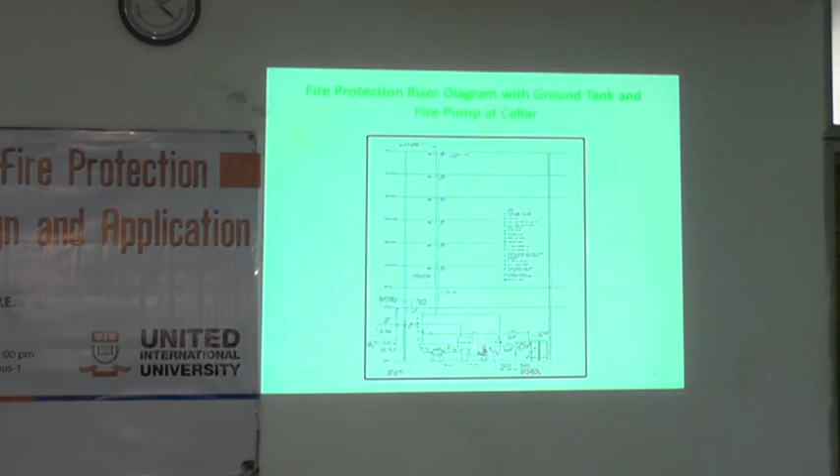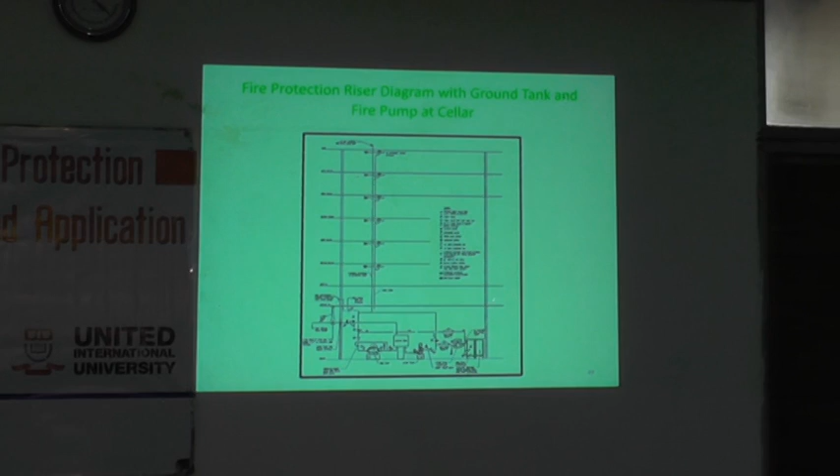At the ground floor. Instead of having a tank on the roof, you could have a tank on the ground floor, and you have a fire pump that will pump the water to the floor.

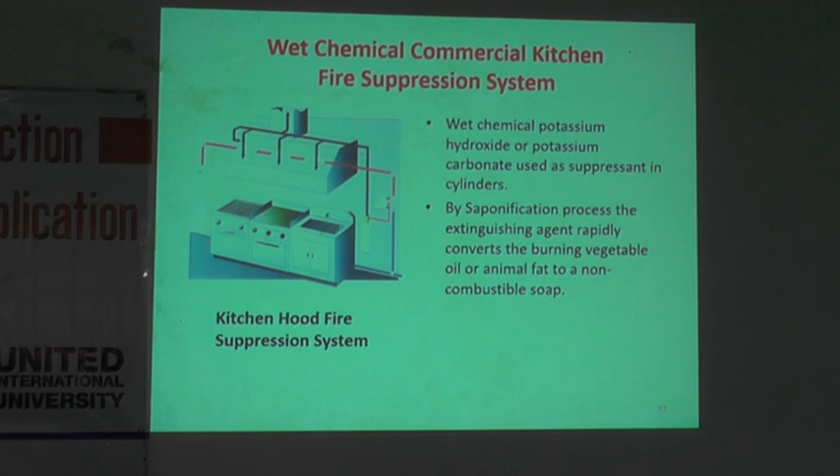Ansul is a company, like Volkswagen or Honda. Ansul is the company. They make this kitchen system, the Ansul kitchen system.

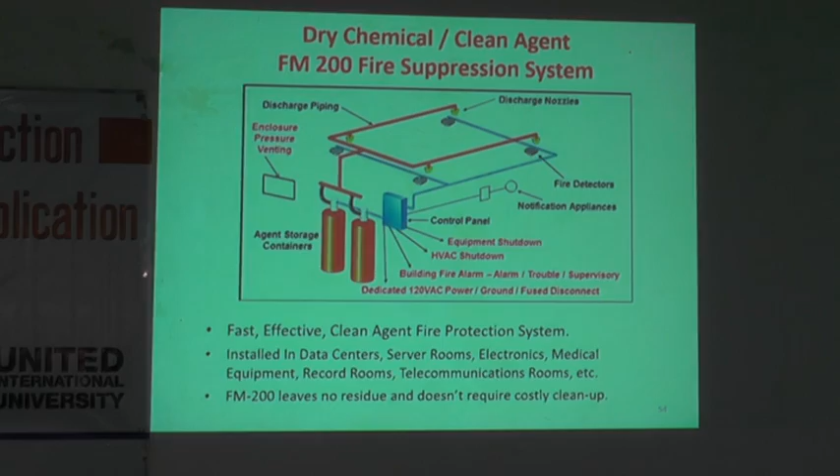So as long as there is a fire, this system will flood, completely fill up this room with the FM200 gas, so that they will deplete the oxygen. If the room is full with FM200, you will not have any oxygen. If you don't have any oxygen, you will not have any fire. Okay, that's how they suppress the fire.

As soon as this goes up, the alarm goes up, people run out, and in 6 seconds they start flooding with the FM200. The room normally has to be sealed, so they can flood it. If you have holes in the walls, this system won't work. So when they install the FM200, they make sure that the room is sealed, and if you have ductwork, the ductwork has a damper. The damper closes automatically, so the room is sealed. Okay.